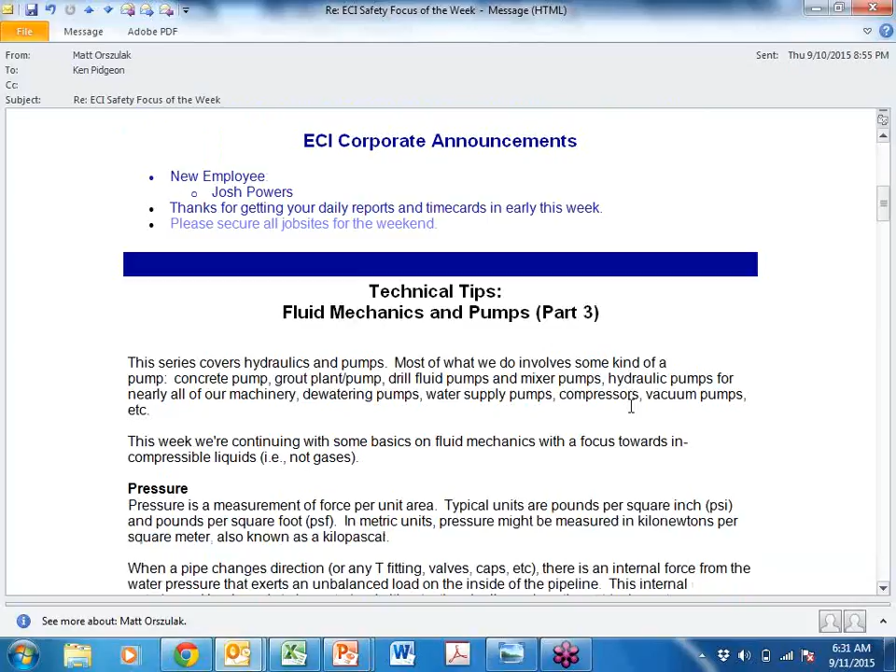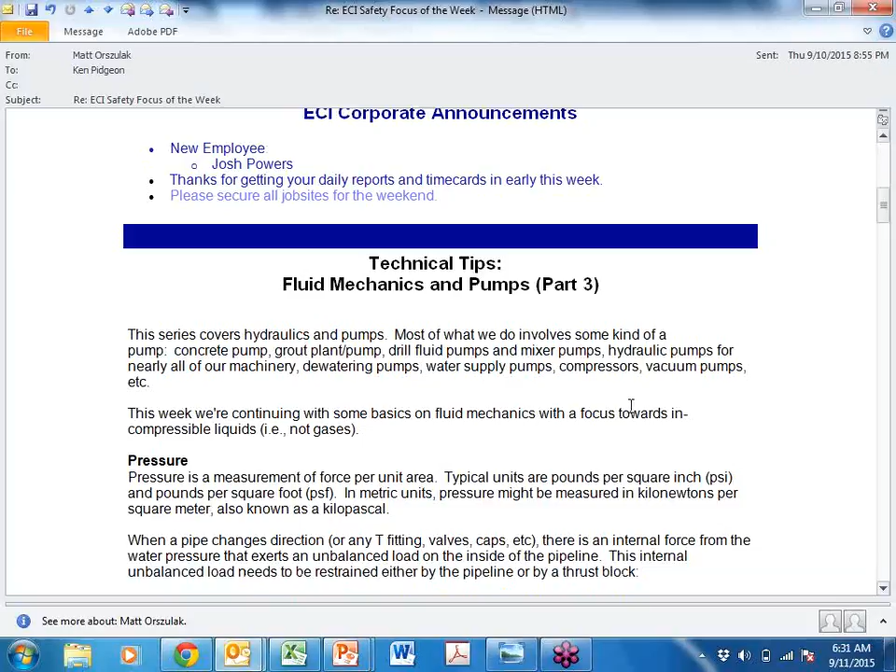Thanks for getting your daily reports in early last week. The accounting department was very grateful, got things running smoothly for the week. And again, still kind of summer, so extra security around the job sites at the end of the weekend, which should be standard anyway. For technical tips, we're going to talk about fluid mechanics and pumps again, kind of a good series to build upon.

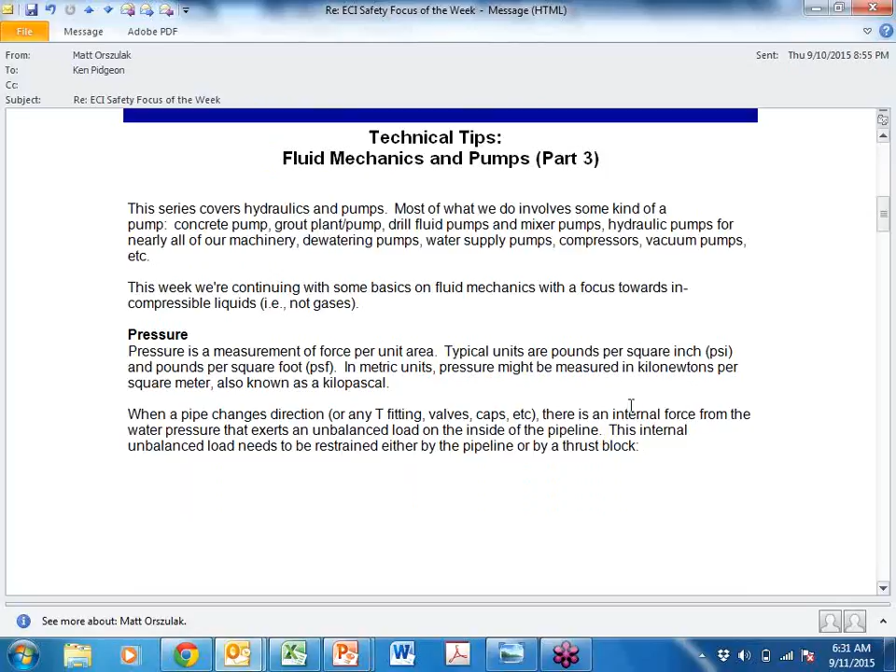And we talked about pressure last week and what pressure is, how it's a measurement of force per unit area, like in a fluid typically. You can have the same force per unit area in like metal or bearing capacity on the ground, but that's usually called stress versus pressure. Pressure is usually a fluid term.

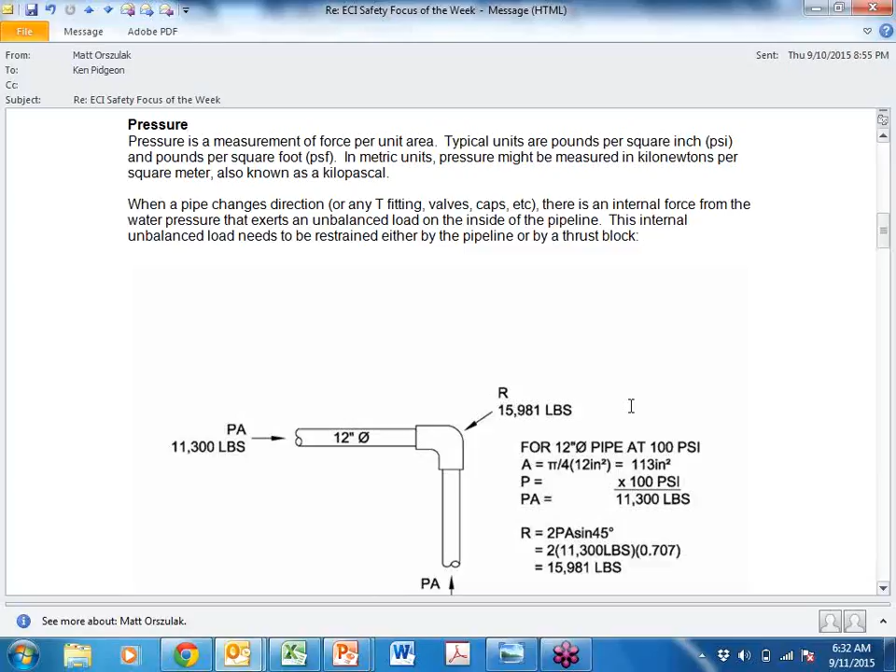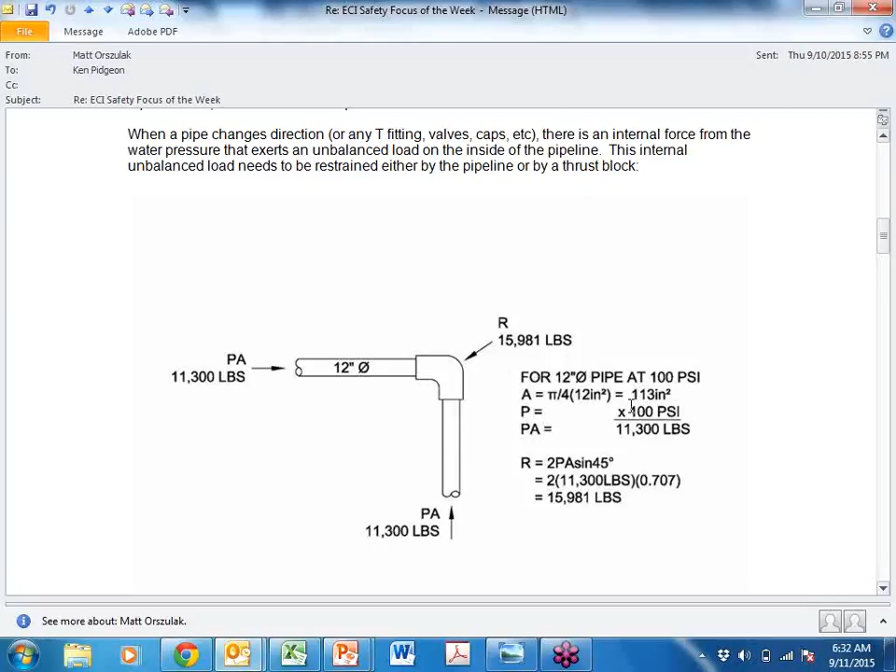And as I promised, we were going to talk about when a pipe changes direction or it has a T-fitting or valves or caps, etc. There's an internal force of water pressure that exerts an unbalanced load on the inside of the pipe, and this internal unbalanced load needs to be restrained either by the pipeline itself or a thrust block. So I put together an example here

with a 12-inch diameter pipe under 100 pounds per square inch pressure. So there's a force exerted on each leg of the pipe. And that's really just the pressure, 100 psi times the area. The area we have 113 square inches, so you multiply that out, and it's 11,000 pounds of force coming in two different directions here. And it's resisted by a thrust block or perhaps internally by the restrained joints if there are restrained joints. So it just gives you a sense of how this pressure resolves into forces. Pressure times an area is force.

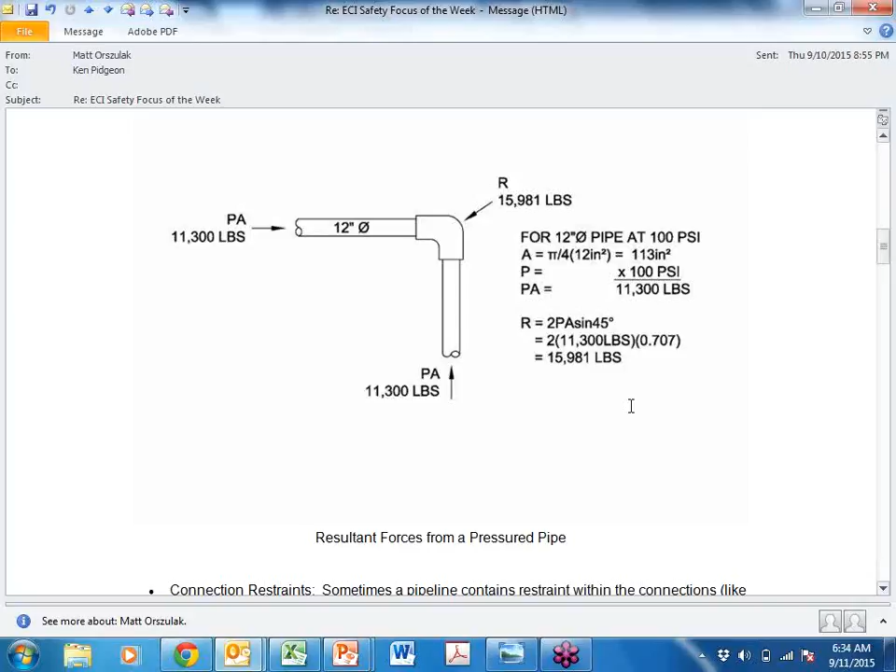And then how we resolve it in this case, and there was a little bit of confusion on my part when I first put this together. Part of it is where you reference that angle. I called it 45 degrees. And what it is, this angle here, you take half that angle, and you take the sine of 45 degrees. I had my head in a different direction, and I was thinking cosine, because the cosine and the sine are the same for 45 degrees, so the number came out right. It's all about how you measure angles here. So anyway, that's how it's done for coming up with loads for thrust blocks.

And there's different options that you could use. You could use a connection restraint, and sometimes the pipes use a restraint within their connections. And like for ductile iron pipes, say, you got Field Lok gaskets, you've got Mega-Lugs. And amazingly, I think these systems are designed for a 350 psi pipe pressure.

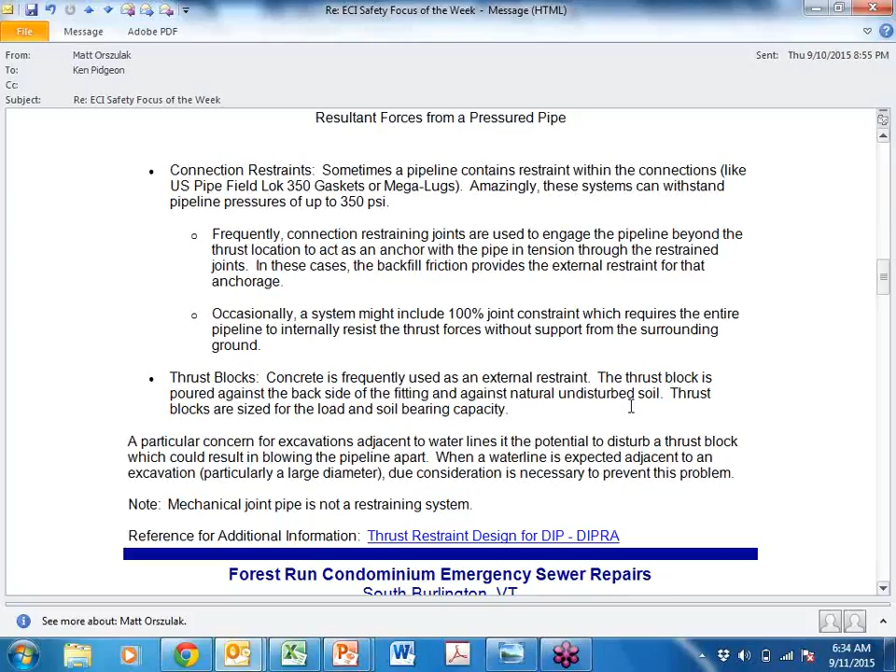I wouldn't necessarily put everything into that at 350 psi for all of us. So frequently, the connection restraining joints are used to engage the pipeline beyond where that thrust is to act as an anchor. So the pipe is actually acting like an anchor to hold back that thrust load by anchoring the pipe back into the ground. And so therefore, you need good compaction around the pipe, especially around the bells, to grab it good.

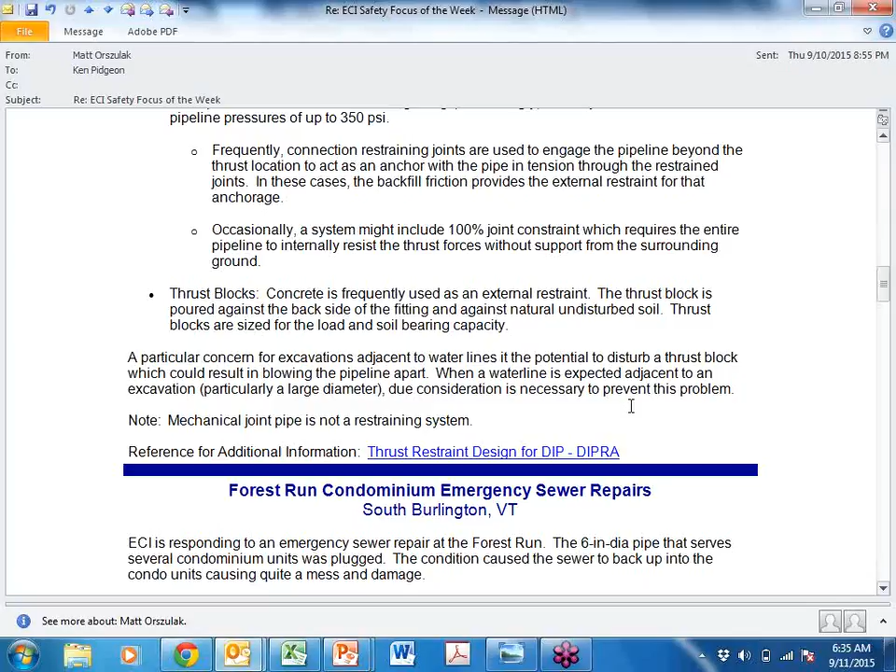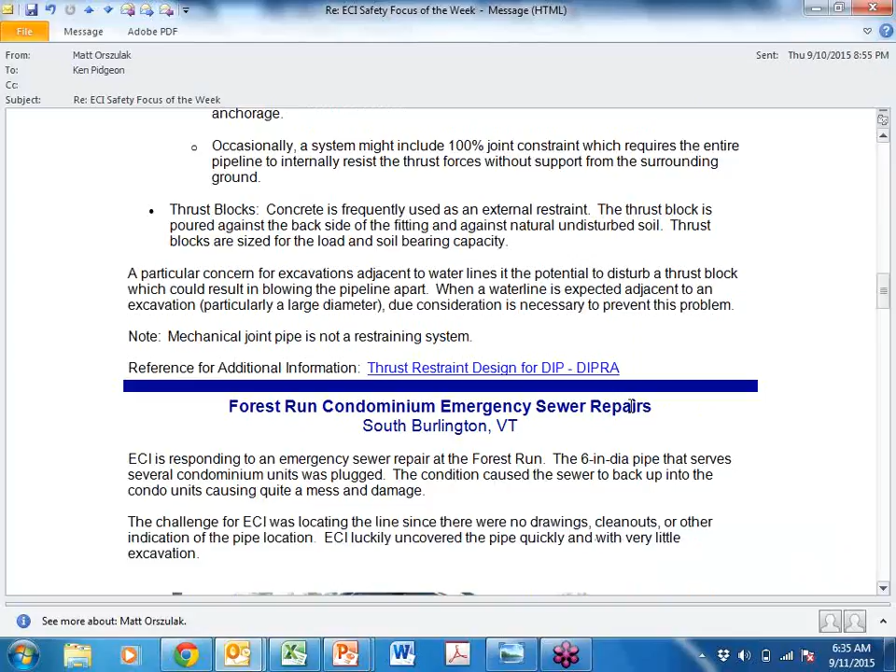And then sometimes you might even have 100% joint restraint, which theoretically might not require any thrust blocks or anything. But again, there's a lot of assumptions going on there. And then you have thrust blocks, which of course we frequently use with a concrete restraint. So it's an external restraint to the pipeline. And it's poured against the backside of that fitting and against hopefully natural and undisturbed soil. So obviously you've seen a lot of thrust blocks installed, and often the drawings will give you dimensions on certain size pipelines and soil types and all that.

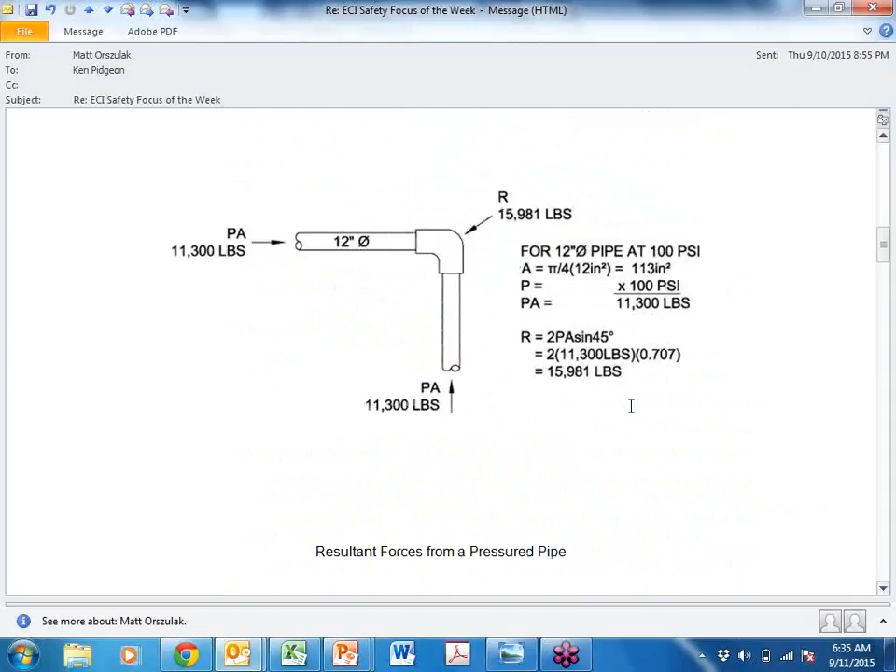And that also is based on soil types, so the soil bearing pressure. If you're in a clay, obviously you're going to get a lot less bearing capacity than you would out of a glacial till or a hard granular material. So now a particular concern when we're digging next to an existing water line is getting next to a thrust block or next to even a pipeline, even if we're running parallel with the pipeline. So we just got to be keeping that in mind when we do any kind of trench or excavation where there could be or are some water lines, especially larger diameter.

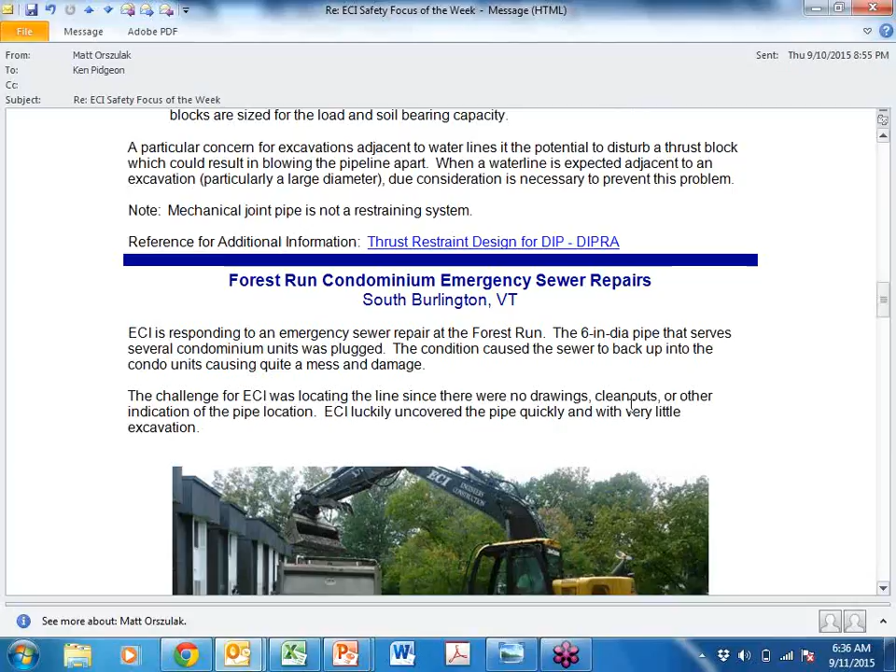There's a lot of force there. Typically, small service lines aren't any kind of big deal, and usually those might be a continuous copper pipe anyway. But whenever we have a water main, we got to be careful around it when we're excavating. And just another note that mechanical joint pipe systems are not restraining systems. They're just made to give flexibility. You might get something out of it, but you can't count on anything, and you certainly can't count on 350 psi. And also there's a reference I linked to called the Thrust Restraint Design for Ductile Iron Pipe. That's by DIPRA, the Ductile Iron Pipe Research Association. So you can click on that if you're interested.

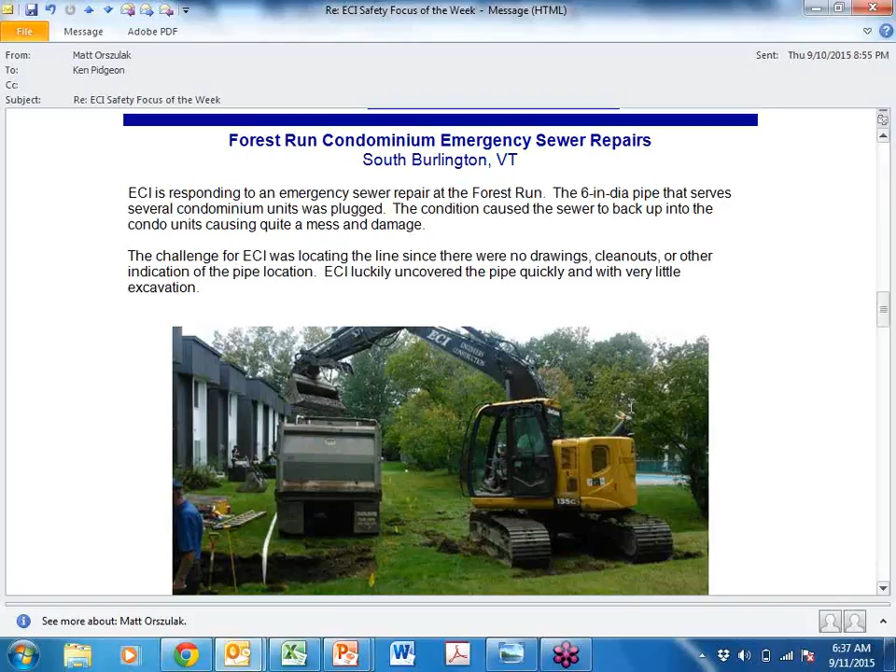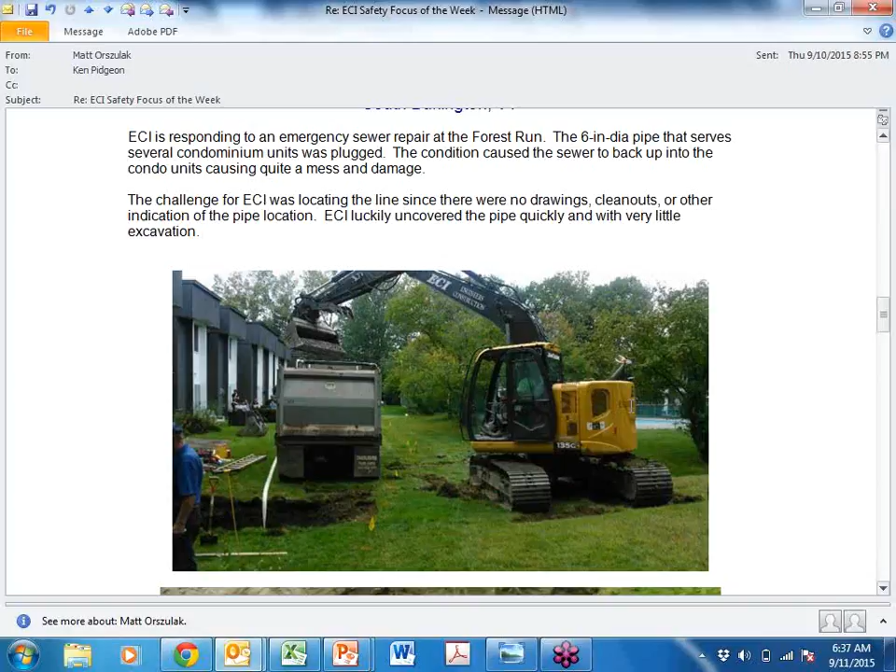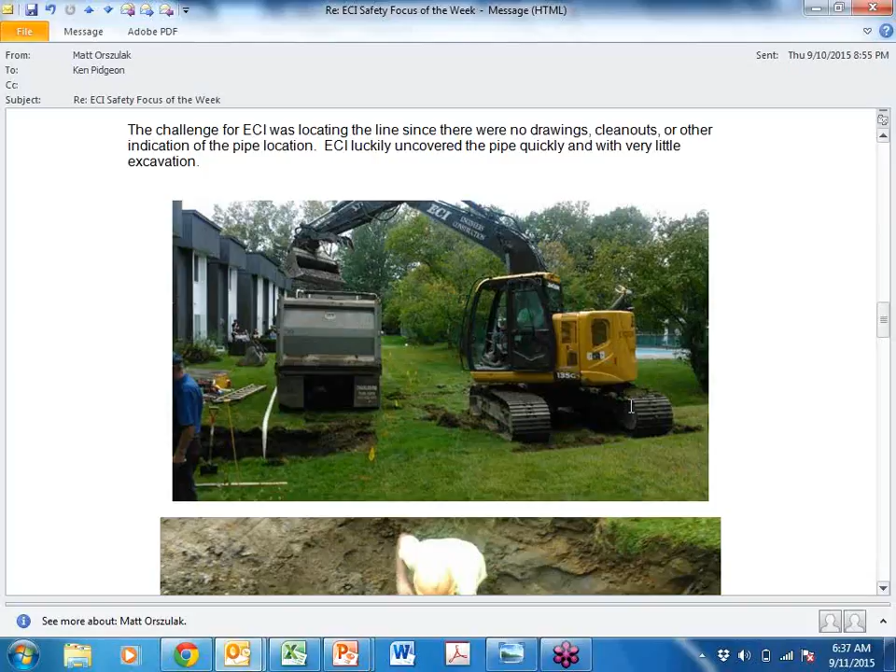For a project profile, yesterday afternoon and into the evening, I had a crew at the Forest Run Condominium Emergency Sewer Repairs. That's in South Burlington off Timberline Ave. This is a condominium association, and it was a 6-inch pipe that served several condo units, and it was plugged. The condition caused sewer to back up into the condo units, quite a mess and quite an emergency for those people. So we responded, and the first challenge was figuring out where the line was, which was somewhat of a guess. We made some reasonable measures, they focused on a spot, and they were able to quickly locate the pipe with little effort and little excavation.

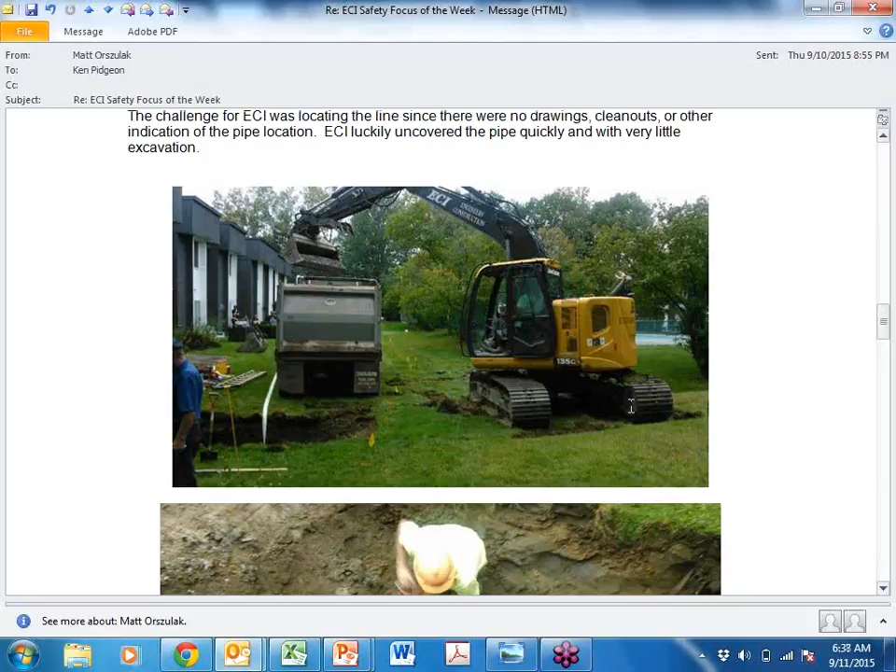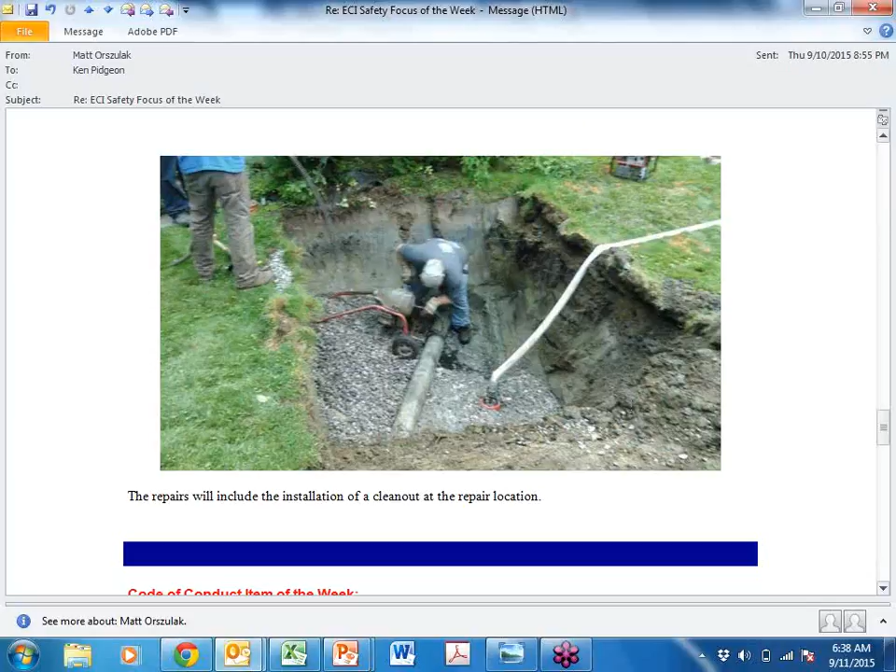So they uncovered the pipe. It's a transite pipe, and it was plugged, of course, so they smashed the coupling and let the water relieve itself. And then it was cleaned out, and we did our repair. And then at the end, I understand we already put a clean out in, right? Got a clean out installed there. It goes both ways, a two-way clean out. So they'll be able to clean out the pipe, and next time we'll have a better sense of where to find the line if we end up doing it again. So probably pretty much a completed job at this point, other than a little cleanup.

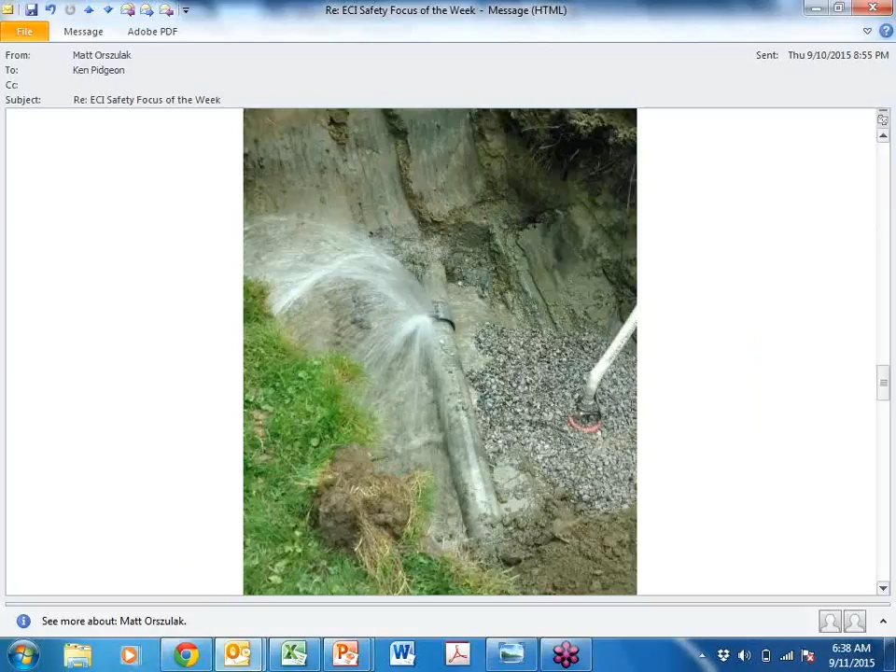So good. Okay. Well, like I said, we're not talking about the role of the spotter. We're going to talk about chains, and Matt's going to give us a little presentation. Thanks, Ken.

Before we get into chains, just a quick refresher, not an update, I guess you can say update, just an annual refresher on the overall federal and state employee rights posters. This is more human resources, but again, it's just a good reminder. These are all the rights you have as an employee working at a place of employment. It doesn't matter where you go, these are the rights that you have.

Some of the newer ones: the equal employment opportunity poster has actually been updated. I need to update my slide. There's new posters for that. Again, you'll see them in this room, right in the back corner. All that information is readily available. I can print this out for anyone that wants to read more about that. We also have one in the main office. Any big job trailer will have all these regulations on it. It's pretty much just a Cliff Notes version of the regulation, what you need to know.

And then the other one is the sexual harassment situation, and in this company that goes right to the highest level. If anyone has any issues, we just bring it right to the highest level and we deal with that conflict. So just a good refresher about your rights. Any questions, please just ask myself, Ben, Ken, Scott, anybody.

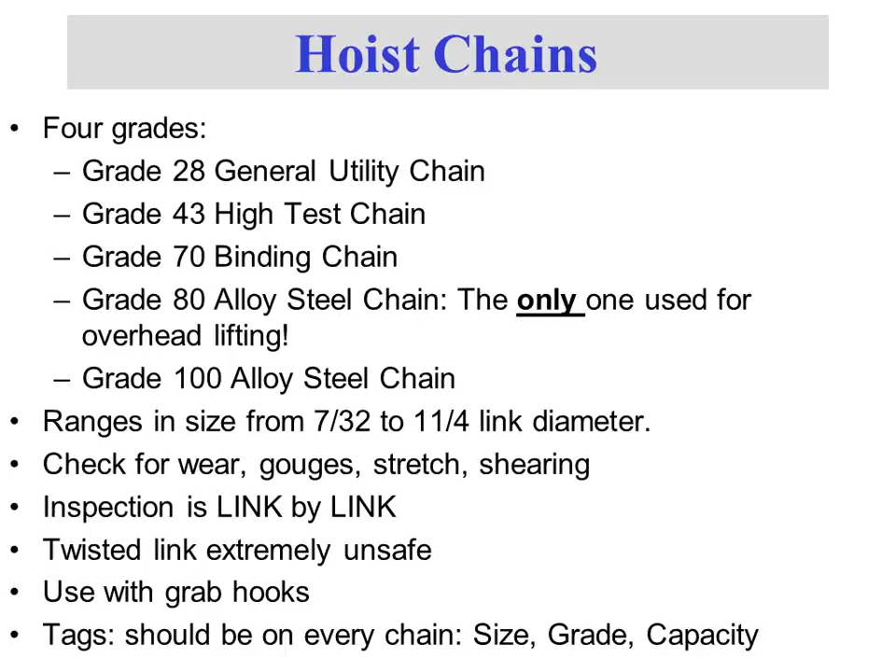It's just, why not, for pretty much the same cost, get more working load limit. This is only for 7,100, where you get 8,800 with a grade 100. So it's just add a little safety factor for us. So that's what you'll see on these chains going around. G80, or for us on the 100s, just say G10. That's a good identification marker.

All of our chains hopefully should still have the tags. If it does not, let us know. We can do an inspection quickly. I want to hand these out as well. I got a lot of these free from Haynes Supply. I don't have many left, but again, this is a good tool for like the foremans out there with the job trailers with a lot of rigging.

You have a quick little wear identification, and there's these slots here. So you take that chain and you put it vertical, and what you want to do is you want to check the wear of where the links come together, and then you would use this little gauge, and if it fits into the slot of a 3/8 slot to a 9/32 slot, that means you have more than 10% wear, and we should take that out of service. So I'll leave these here if anyone wants them. I know I've been handing these out frequently when I do my more annual inspection of chain links.

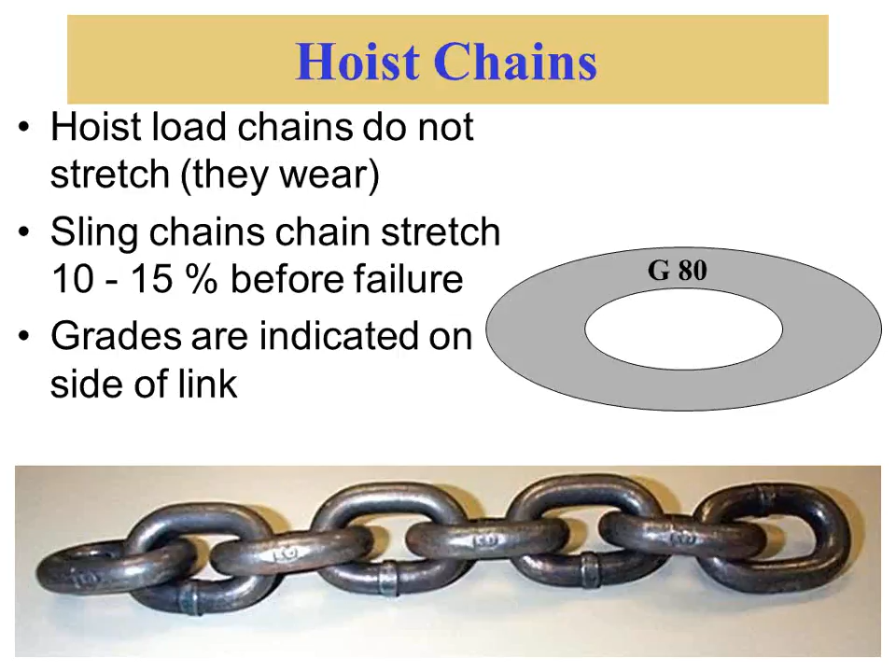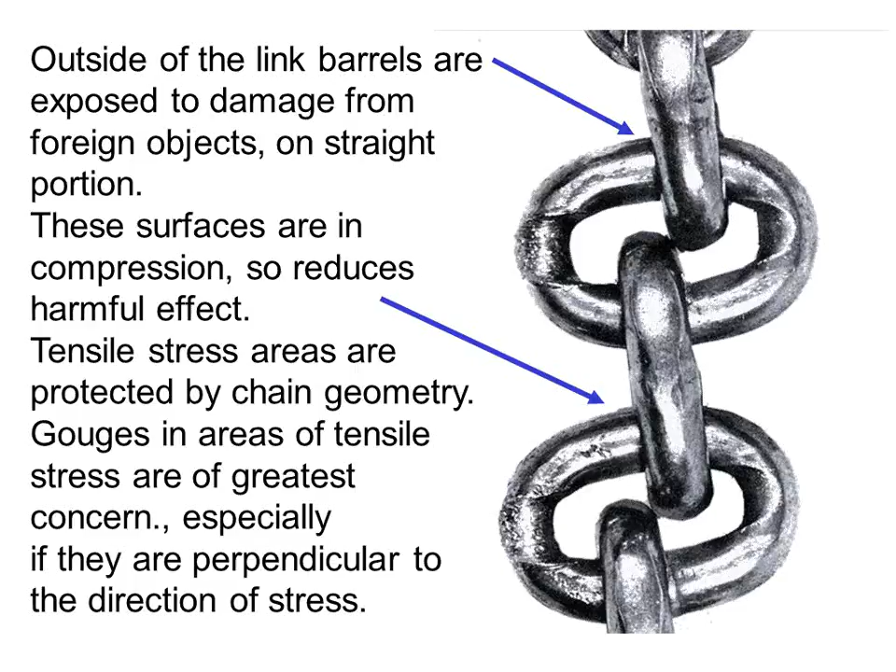So again, 10% wear of our links. Take a look for bending, stretching links out there. And this is actually a good visual here that you'll see. This is definitely some wear marks here of overloading your links. And that's what you'll do. You'll take this and you'll slide it through. If it goes all the way down to the 9/32 here, we have enough wear where we need to take that chain out of service. So you see here just bearing points, interlocking, outside, straight side barrels, link by link separation.

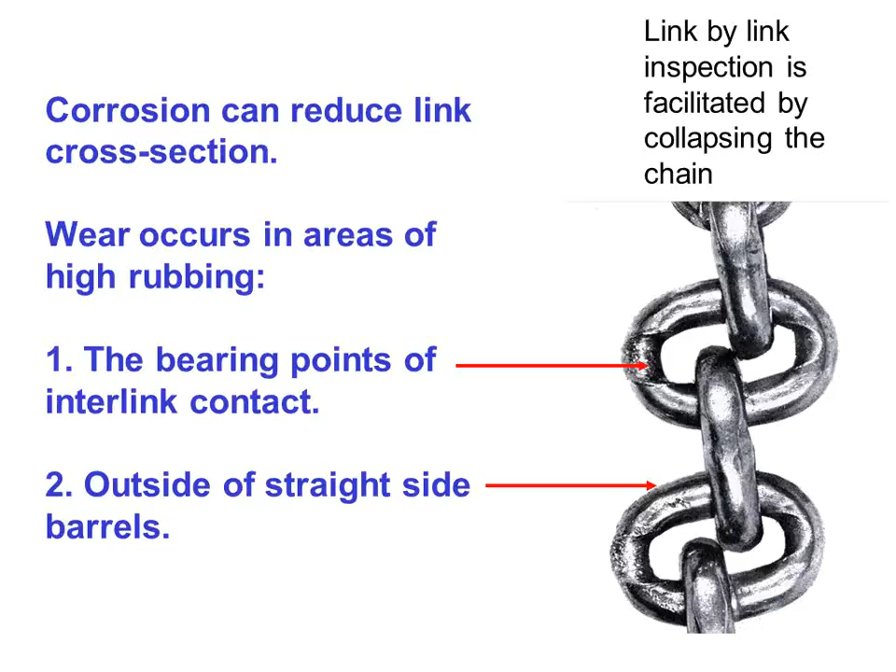And again, when chain breaks, I think a lot of people probably have seen it. It's very violent. Small pieces of the chain actually go flying, and it could create quite a hazard out there. Whereas something like synthetic, when that breaks, that pretty much just drops right to the floor. It's less violent. So chains can be very dangerous, and if we're not up to speed on our inspections, it could relate into a potential injury.

And the biggest thing, we don't have anything out there, but again, no makeshift devices to rehook chains. This is just like a little small shackle that they use to interlock chain because it broke. They try to do a quick repair. Again, once a chain is defective, take it out of service, bring it back to the safety department. We'll issue a new one.

All right. Again, try to make sure that you're really keeping these things clean and orderly in your job trailers. Don't leave them in the back of your pickup trucks where they can get into the rain, snow, everything. Okay, after a while they'll start rusting, and when they start rusting, they really start to lose a lot of their strength, and you start seeing more stretched links and stuff like that. So hang them in your job trailers, make them orderly and clean.

That's kind of a goal I like to see, is a nice clean job trailer, it's organized, we don't have stuff just all over the place. We're really taking care of our equipment, and we're taking pride in our work. So try to focus that this week with chain safety. Inspect them, grab some of these gauges, and keep your trailers nice, orderly. If you have any issues, let us know, and we'll come out and double check it, or we'll replace it in the field. So, is there any questions for chains?

That's it. That's all I have. Thank you for your time. Let's stay safe out there. Treat the chains like your life depends on it. Yes. It does. Yeah.